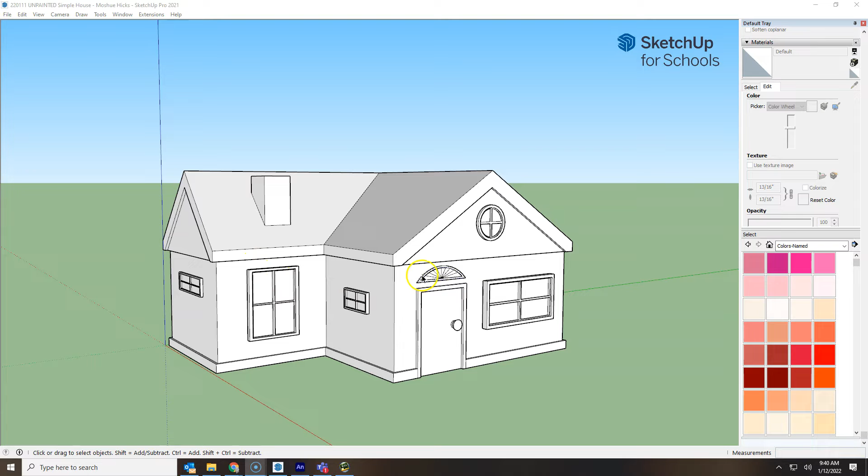So there are some ways of being more efficient that can really speed up your whole process. If you know that you want to work on something, put your mouse right over the thing that you're going to work on. Now, let's say I want to make a border around these pieces of glass the way I did with the 4-paned window.

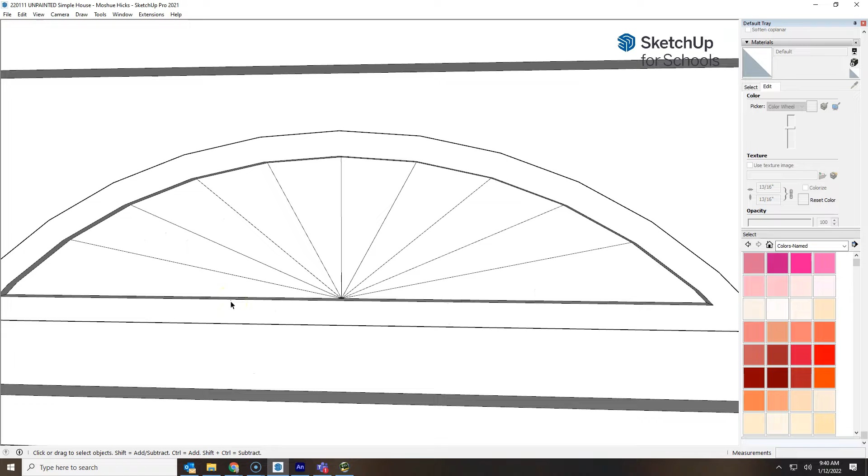If I use my offset tool, it's going to offset whatever's selected. So I'm going to use my selection tool and not have anything selected. So when I switch to F, offset, now it's going to offset whatever I point at. So let me just offset this in maybe 0.2 inches.

So I've got a little bit of offset there, and now I can quickly do all the rest of these, and they'll be exactly the same. Now, the same way we did the window, I now want to get rid of all of these lines. So instead of going and hunting down each one of those, find the place where you can click and drag and clear them out very, very quickly.

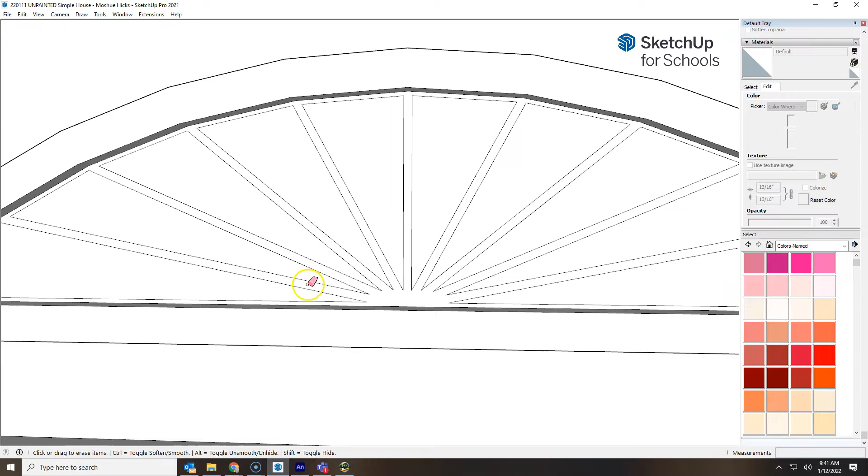Another thing, if I use the push-pull and I bring this out the way I want to, I now have lots of faces that I'm going to have to paint. So this may be one of those cases where you want to paint it first, and then when I pull it out a little bit, it's bringing that color with it. As you can see now, all of those faces have that one color.

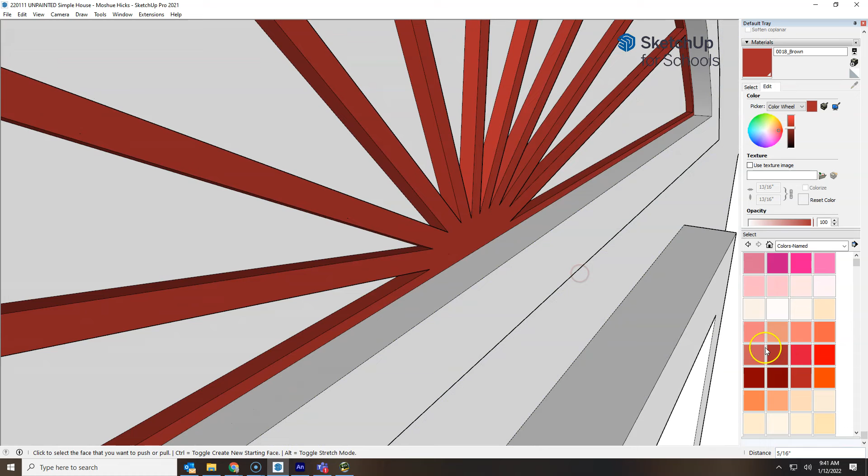And it doesn't really matter what color it is, because you can always go and shift click on that color. Everywhere that color is in the house, it's going to change. So you can just pick colors and later do the wood textures that you want to use for your house or anything like that. So this is just an architectural detail that's going to look nice over the door.

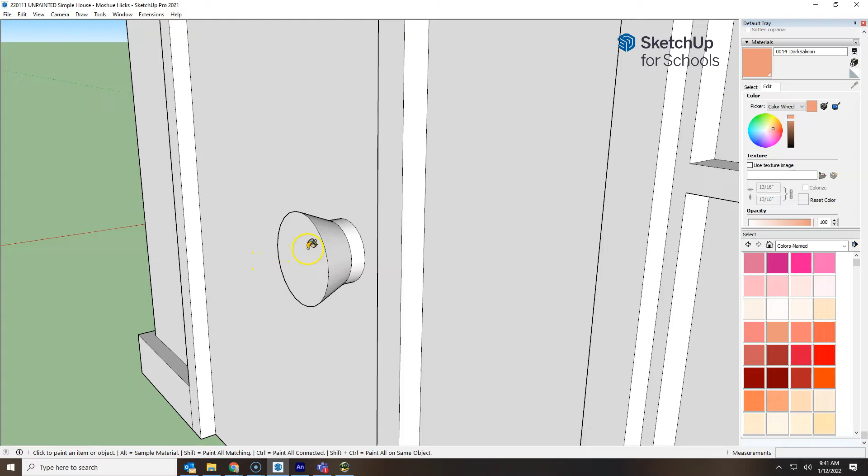Adding things like doorknobs and stuff like that is really pretty handy. This is a pretty easy thing to do here. If you just pull that out and I use my push-pull tool, I can tap Control and now it's bringing out a second face. So if I scale this one now, S for scale,

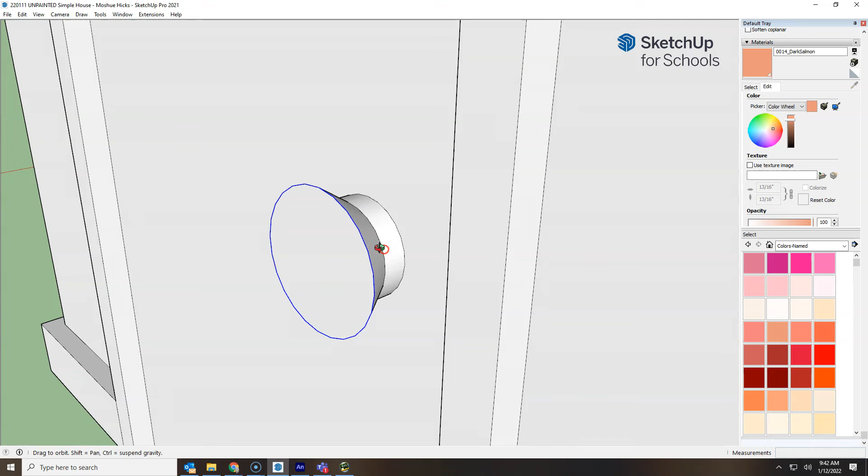I can make this a little bit bigger, and then I could even pull that out. Again, tapping Control gives me another one. So Control and pull, and I could do something else with this one as well. So that is another pretty handy thing. If I want to bring that back down, I've got something that kind of looks like a doorknob.

Now I didn't hold down Control, so it didn't scale to the center, and that's a big difference that you want to get used to here. So S for scale, clicking, and now holding down Control, it's going to go towards the center. So it doesn't have to be a sphere to look like a pretty nice little doorknob. So just a couple of things that can be extremely handy right there.